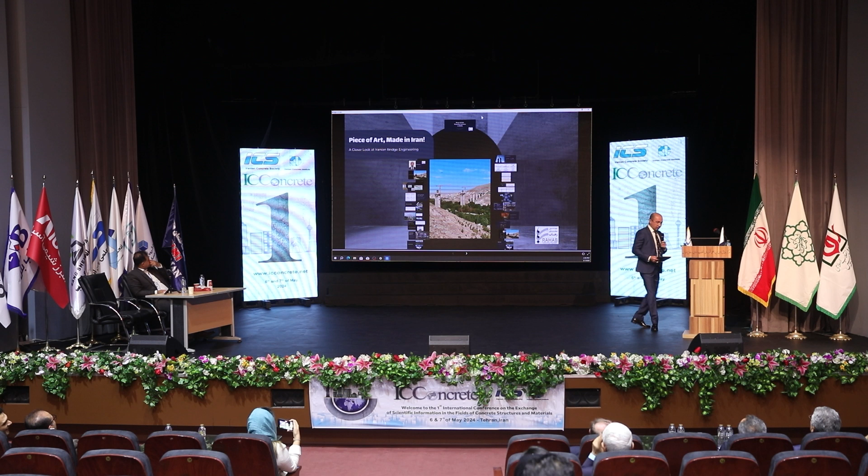I do my best to squeeze my 1 hour lecture into less than 20 minutes, even less. What I'm presenting today is a piece of art made by Iranian engineers. I'm not familiar with this thing, so maybe it takes some time to go through the slides. I had many notes. I think it takes time if I go through them, so I make it simple.

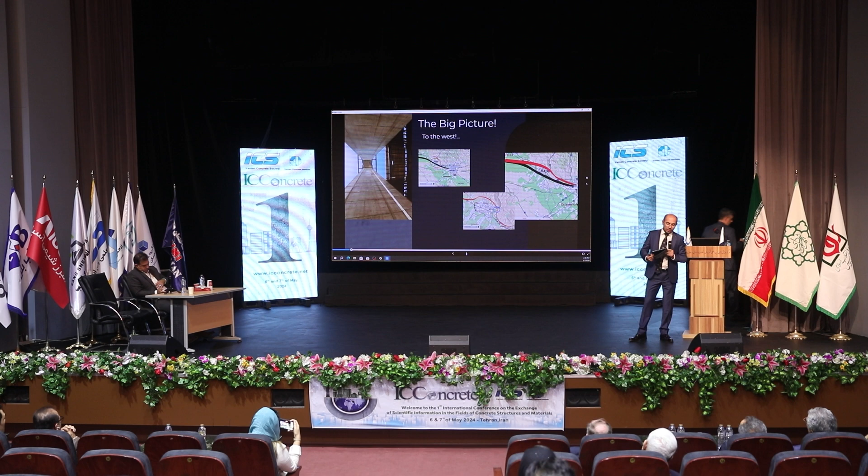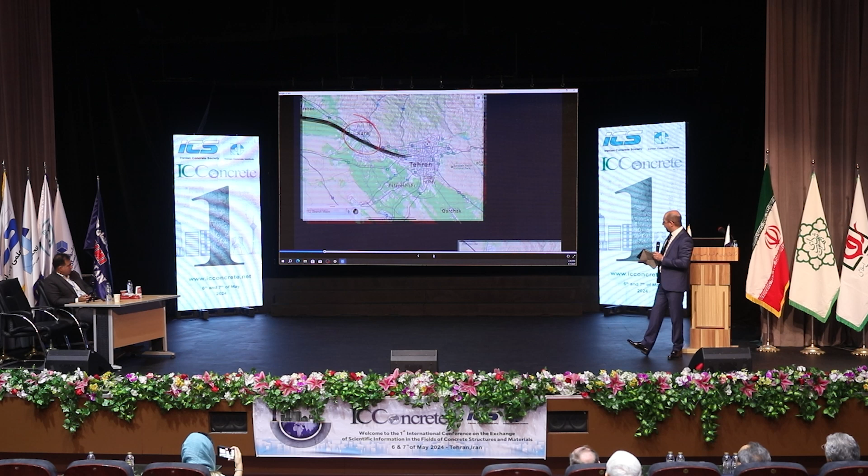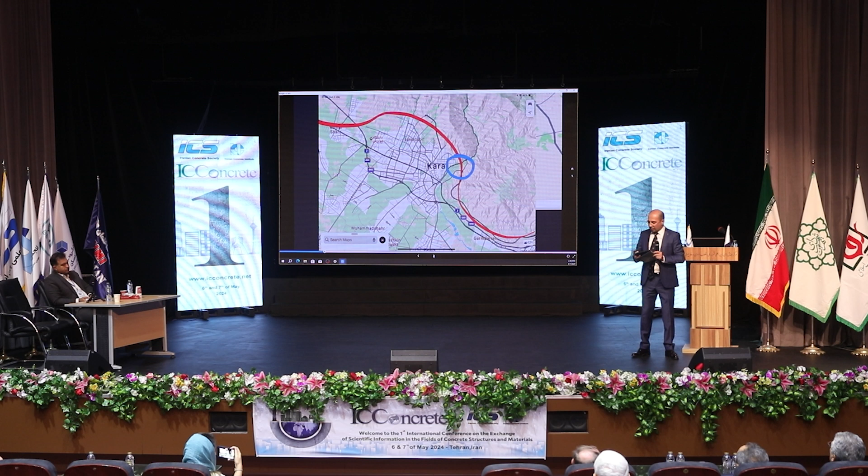If you want to go from Tehran to the west of the country, there is just one main road, which is the Tehran-Karaj-Qazvin highway, which doesn't meet the demand. We need a second one, and we are building one. The Hemmat highway, which goes to the west, when it tries to pass Karaj city, there is a bottleneck. That bottleneck is the Karaj River, which is a 600-meter wide valley, 100-meter deep.

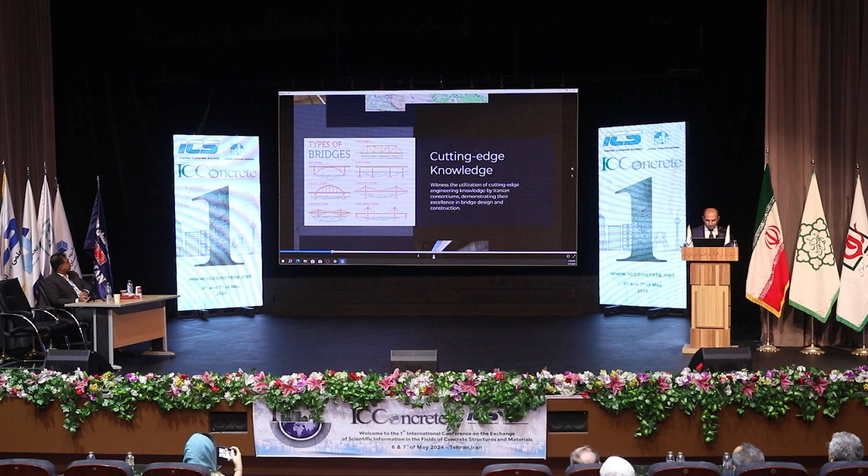So we need a huge bridge for that. Of course, there are many different types of bridges. It's not necessary to go through all of them. We pick 2 of them which are more relevant to our project. The first one, Girder Bridge, and the second one, Cable Stayed Bridge. These 2 are the main bridges we could consider for this project.

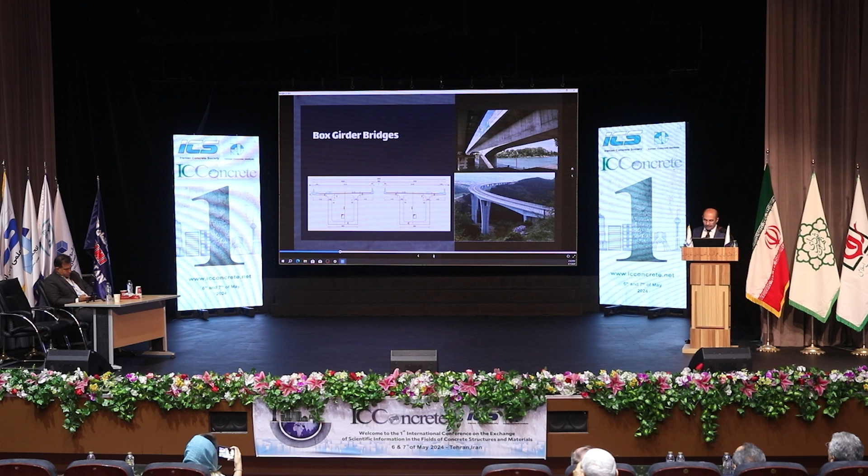Let's look at the first one. It's usually a massive bridge with heavy construction, and it's suitable for spans up to 150 meters. It's not suitable for what we are doing here. If you go beyond that, the box itself will have a dimension of 10 meters by 10 meters, which will be really heavy and not cost efficient.

It will be something like this for this project. The second one, the cable stayed bridge, usually has two or more towers, and cables between the tower and the main body of the bridge hold the whole thing. This one is also not so suitable because we are hanging our lives on those cables. Even in the United States and European countries, more than 75% of bridges don't receive enough maintenance.

So this one definitely doesn't suit a country in the Middle East, where we can imagine how the maintenance will be. This is the general shape of this type of bridge, a very tall tower and main span, which is not suitable for our project. They come in very different shapes, but the concept is the same.

Let's talk about the design criteria. We didn't want to have the heavy first one, and we didn't want to have the maintenance-needed second one. I had lots of explanation on each of these slides, but I'm trying to go through them really fast because we are already late in our schedule. So I just skip them. I'm telling the main concepts.

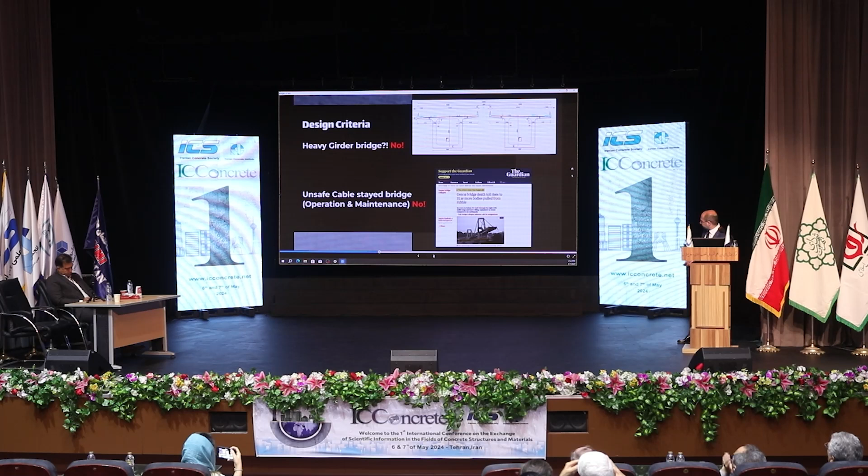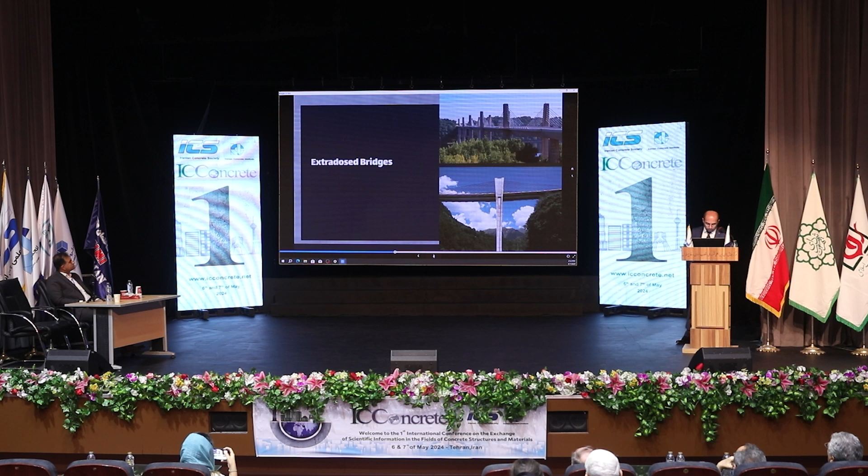By combining these two types of bridges, we chose the extradosed bridge type to pass the Karaj River Valley, a hybrid bridge structure blending characteristics of girder bridge and cable stayed bridge, spanning between 200 meters to 500 meters. So it's definitely suitable for our project.

So what makes this type of bridge safe? The main body of the bridge, the dead load, will be carried by the box girder, and the traffic load will be carried by the cable stays. If we compare these three types: this one was the girder bridge, which would be really heavy, and that one was the cable stayed bridge, which was not safe because of maintenance issues—not suitable to be chosen for this project. So we combined these two.

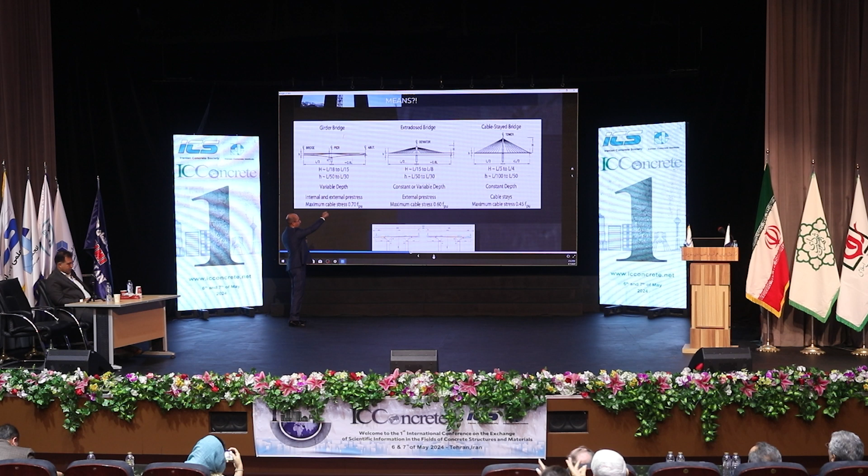Of course, we didn't invent this type of bridge. In the middle is a combination of these two types of bridges, which has a lower tower and a stronger body—lower tower compared with the cable stayed bridge, and not as heavy as the girder bridge.

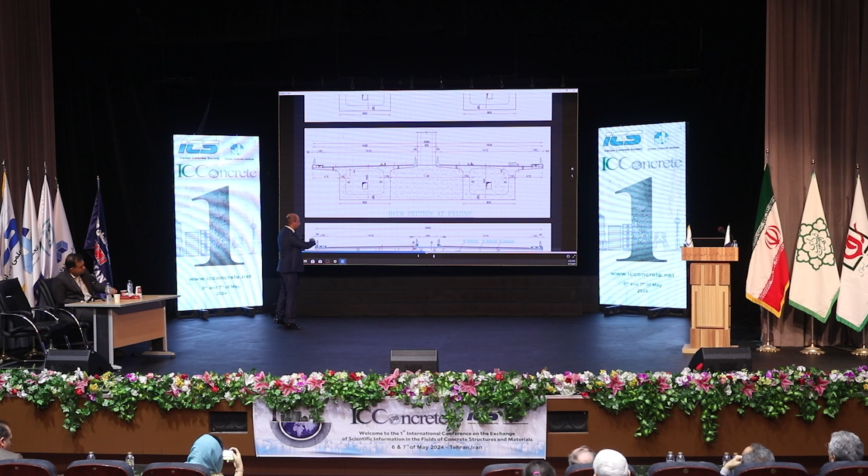Here I'm comparing the cross section, which obviously our choice is this one in the middle. If I wanted to go through the details, it would take lots of time, so I'm just going really fast. What it provides to us? It provides optimum cost and safety.

To compare this, in this specific project where the main span is 170 meters, it gave us 20 percentage cost efficiency comparing to girder bridge, and 60 percentage cost efficiency compared to cable stayed bridges. Of course, it's much safer.

This is the ultimate design we came up with, and actually it's under construction. They are already building that.

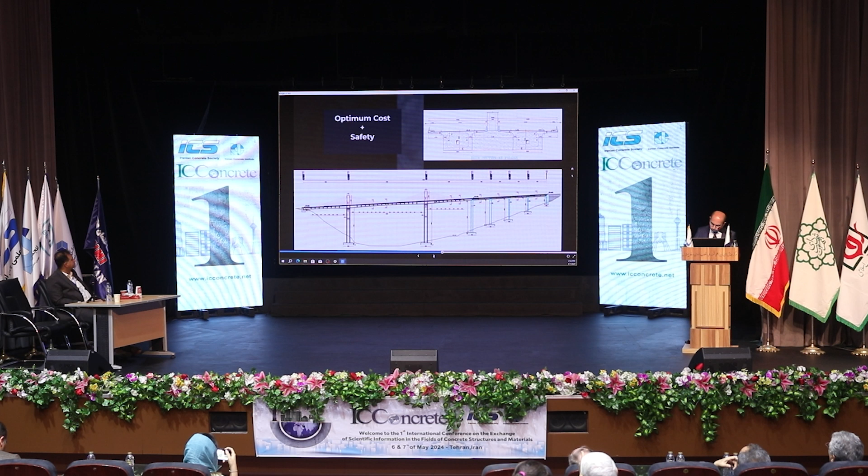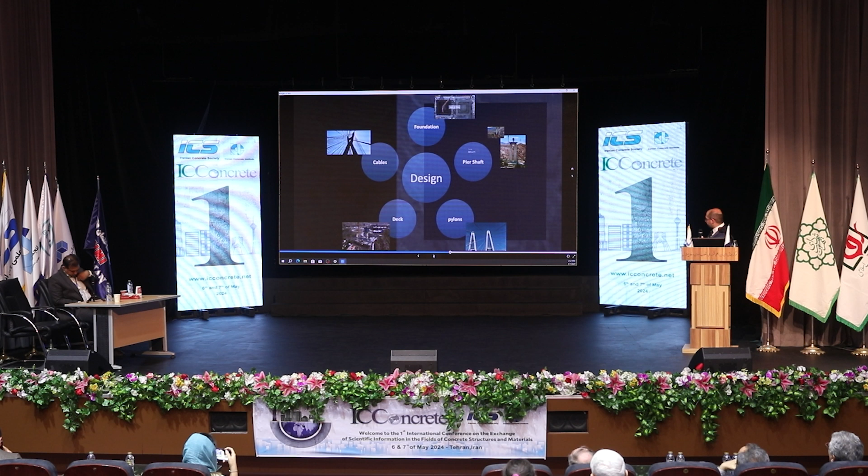Let's look at the design. These are the 5 different parts which we had to think about when we were designing this bridge: foundation, pier shaft, pylons, deck, cables. We won't go through all of them. This is the foundation of one of the piers.

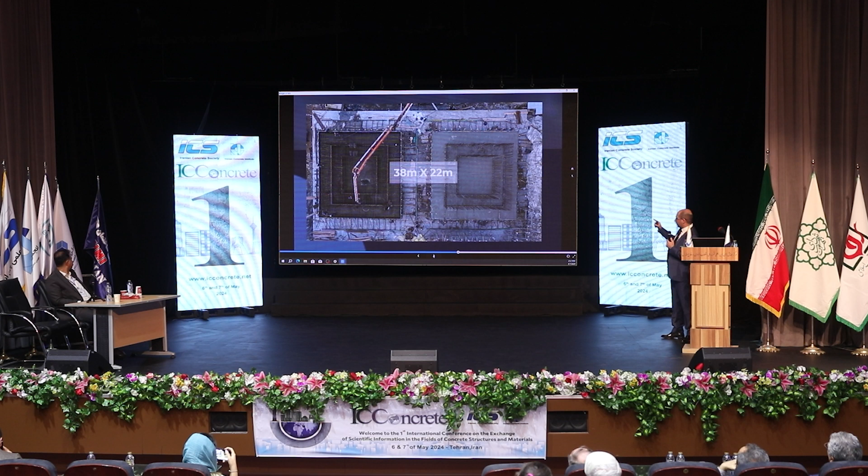Dimension is 38 meters by 22 meters, and it's 2 meters deep in the ground, which concludes in 1,700 cubic meters of concrete work. It is something like this if you zoom in.

Pier shafts, there are 2 main pier shafts. Each of them is a double, or if you wish, twin pier, where the tall one is roughly 90 meters, and the shorter one is about 70 meters.

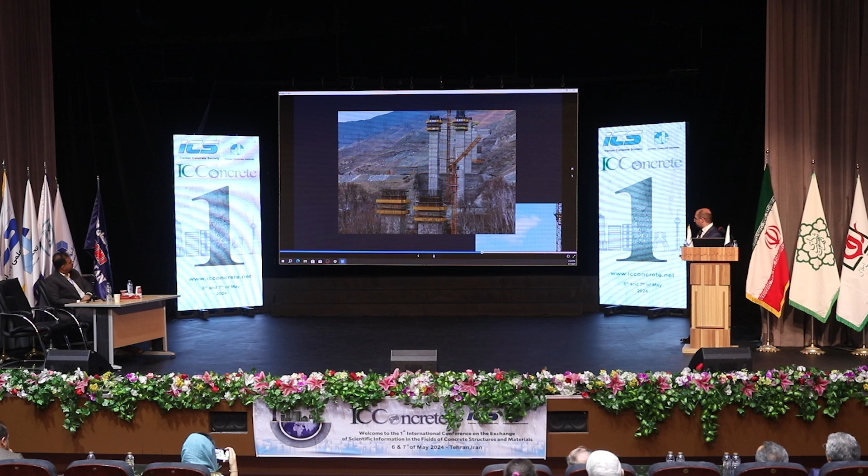And there are some minor piers which give access to the main span. Well, we'll pass them.

This is the main part, the difficult part, in design and also in construction. The deck of the box girder bridge is under construction now using the segmental construction method with the help of a balanced cantilever chariot system.

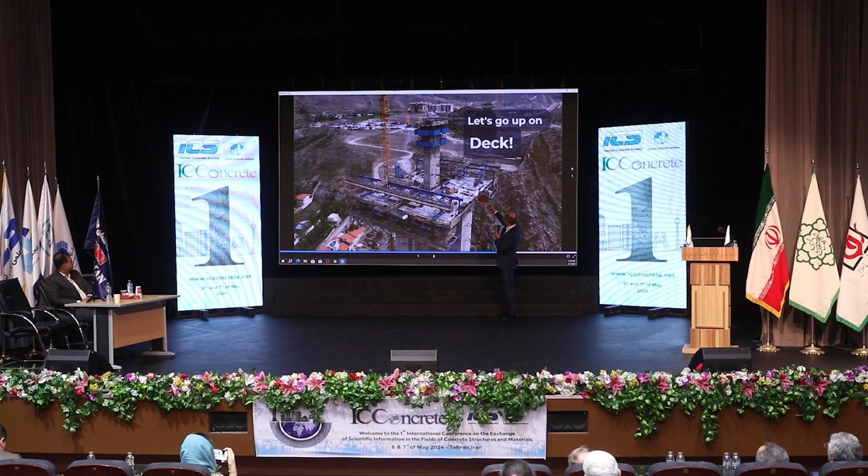There are 2 chariot systems which move at the same time, one in this direction and the other in the opposite direction, to keep the balance during construction.

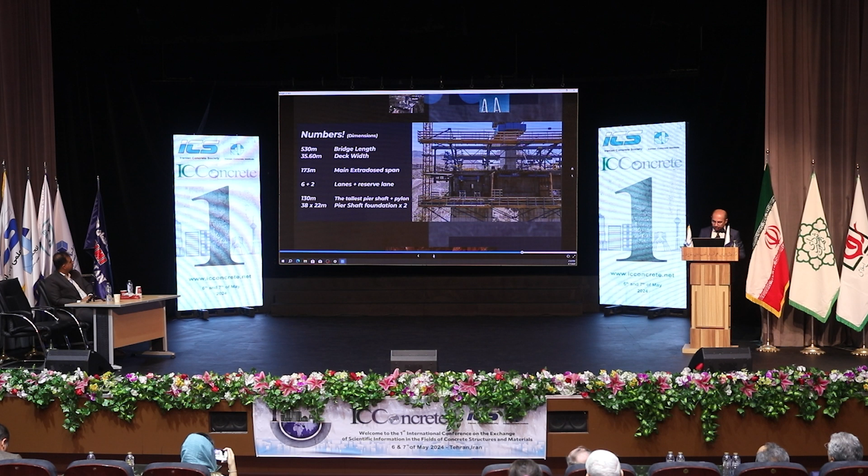Well, we'll skip the cables. Let's look at the numbers. 530 meters is the entire length of the bridge. 35.6 is the entire width of the bridge. 173 meters is the main extradosed span. And this bridge, when finished, can support 6 main traffic lanes plus 2 reserve lanes.

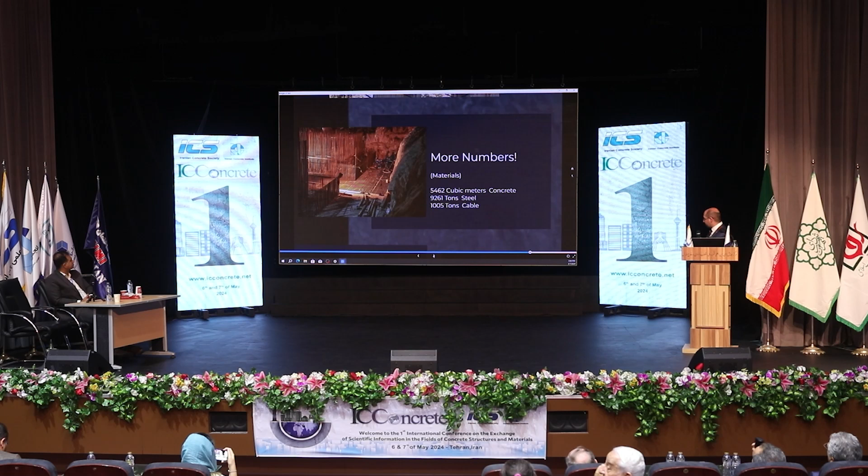These are some more numbers: 5,500 cubic meters of concrete, about 9,200 tons of steel, and about 1,000 tons of cable is needed to complete this bridge.

This is a video which I'm not sure how I can play here.

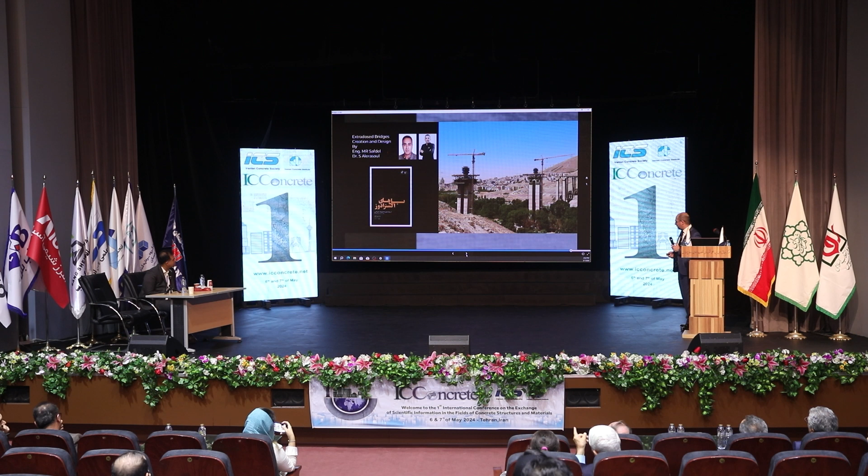When we were talking about this presentation, the first thing that came to my mind is the fact that I wanted to highlight that this is made in Iran entirely, in case of knowledge, in case of construction, and in case of everything. We should take into account that Iran is under the heaviest sanctions, and we could not even contact our colleagues in FIDIC to ask them for help. So it's done by Iranians in Iran, so proudly we call it made in Iran.

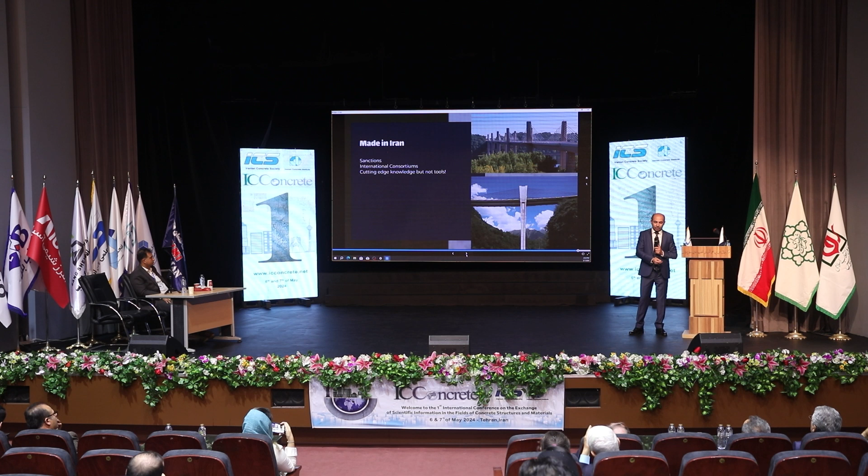Usually for this type of mega projects, there is a combination of many local, international, and multinational companies coming together, working for many years to design the thing and then start building that. But here we were really, really alone, we Iranians.

I really tried to go fast through everything. If I wanted to go into the details, it would take lots of time, and already we were behind schedule. So I even don't know, I didn't start my timer. Every time I start my timer to make sure I don't pass the time, so it was not necessary. I think in 10, 15 minutes it's finished.

So we called this thing a piece of art made by Iranians in Iran. Thank you for attention. I wish I could show you the video clip which we had, but maybe for another time. Thank you.